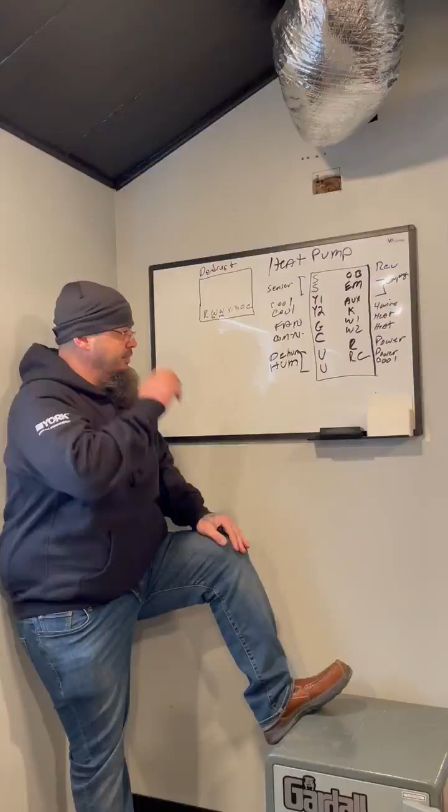Still working on thermostats. We're going to talk about a heat pump thermostat. This gets into one that gets difficult for some homeowners. There's a lot going on in the amount of conductors and functionality that it takes to get a heat pump to operate. So I'm going to lay that out for you so that at least you can see where you're at when you start going with this.

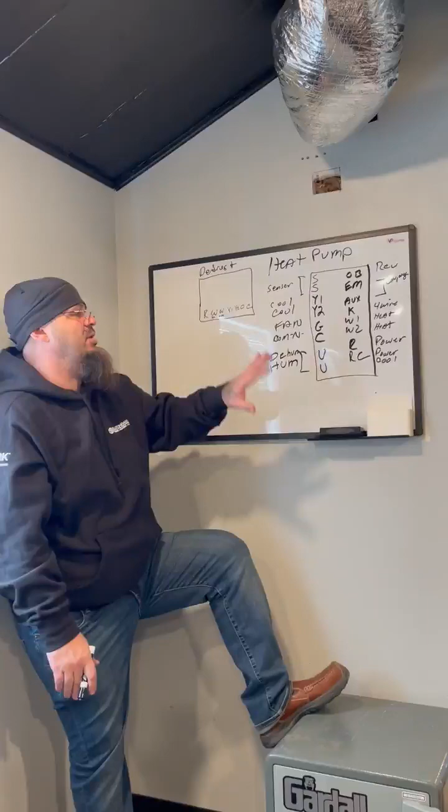I'm doing this in front of the whiteboard because trying to show the backlight of the thermostat on a video, I can get the video to be somewhat good, but it's not perfect. I am gonna do a video with a couple of thermostats and try to get the best picture I can with me actually operating the thermostat. But this way you can really see what's going on clearly. I'll do one of mounting one on the wall. But functionality, selection, wires, all that stuff, classroom time is your best bet with that.

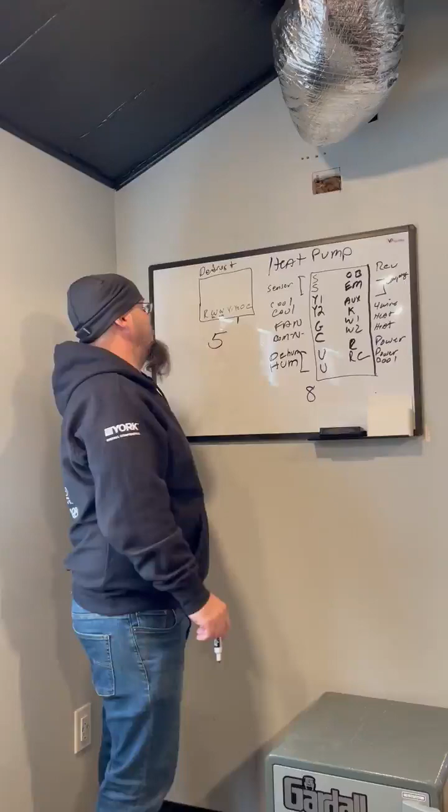So lots of wires with a heat pump. We're going to deal with this as if it's a single stage heat pump. If it's more than one stage, you're just going to have extra wires on Y2. One of the biggest differences is we're going to have a defrost board that we have to work with the functionality as well, and that adds a layer of complication. So typically we have 8 wires coming into the thermostat, and we have 5 wires if it's single stage coming into the defrost board.

You're going to have Y1. Y1 is your condenser wire. Same as in air conditioning, it just tells the condenser that it's time to turn on, in both heating and cooling. So the Y wire doesn't know or care whether you have a call for heating or cooling. All it knows is it's time to turn the condenser on.

Where the rubber meets the road with a heat pump is right here. That's your reversing valve. Inside of heat pumps there is a valve that allows it to switch from heating to cooling. It quite literally reverses the system. So your O or your B or OB is your reversing valve terminal. A little bit of complication there. There are some systems that tried to be too cute and switched the way their reversing valve works compared to everybody else's. The two most common ones are Ruud and Rheem. Basically, they're the same company.

When a heat pump is sitting there doing nothing, it is in heating mode. If you don't power the reversing valve at all and you just give it Y1, it's going to come on in heating mode. When you power the reversing valve, it's going to come on in cooling mode. Rheem and Ruud are the exact opposite of that, and your thermostat, when you program it, is going to ask you heating power for reversing valve or cooling power for reversing valve. Anything other than a Rheem and a Ruud, you're going to set it to power for cooling, because when it gives 24 volts at the reversing valve, you'll be in cooling mode. So that's one of the extra wrinkles with a heat pump.

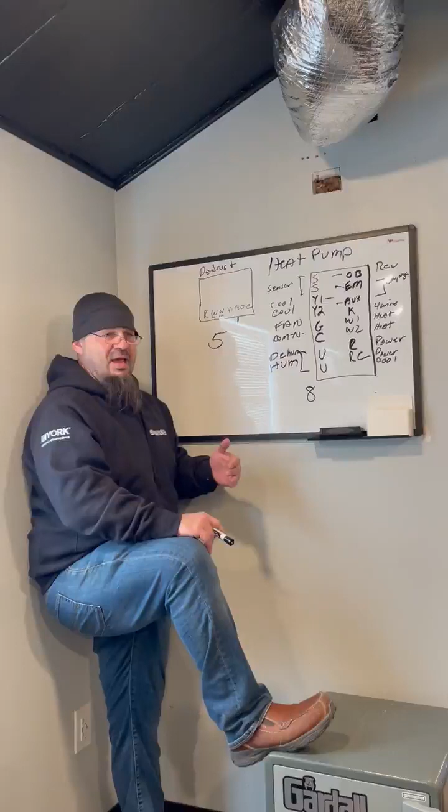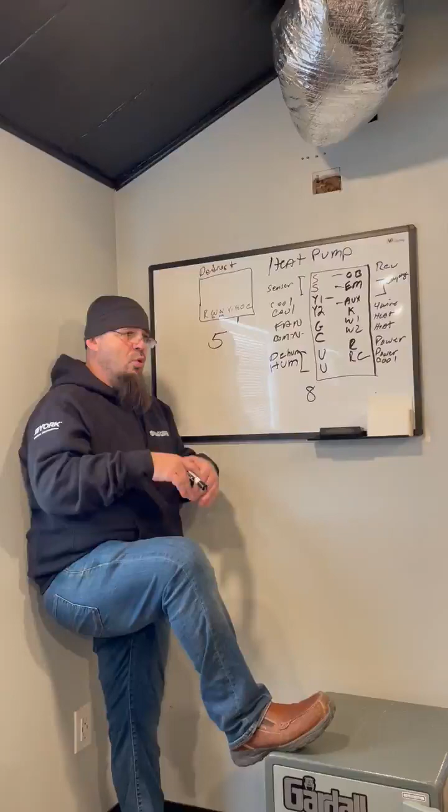So if it runs for half an hour or an hour and it doesn't start to come up in temperature, then it's going to fall back to emergency heating, turn that electric strip or boiler on, and get that system over the hump until either the outside temperatures rise to where the heat pump curve can fill the capacity inside the house, or a call is no longer needed.

In emergency and aux, most thermostats are going to ask you if you want them both powered at the same time. Typically, you're just going to say yes. There are things you can hook up to this system that you would want to operate independently. If you have a system like that, you're probably going to need your technician to come out, because that's another layer of complication. So this emergency heat will operate on its own. It's an automatic switchover based on what the thermostat's programmed to do.

It's going to switch it into emergency heat without any interface from you. It also gives you the option to push it into emergency heat. That can be necessary for a couple things. One, it's taking too long and you happen to be in the space and it's blowing cold air on you, and you're like, that's uncomfortable, and it's because it's too cold outside and the thermostat hasn't caught up yet, or whatever the case may be, and you can push it into emergency.

The other one is there's a problem with the heat pump. If the heat pump outdoor goes down, you can push it into permanent emergency heat mode and run on your electric backup completely until you have a service technician come out and figure out what's going on with the outdoor and get that repaired.

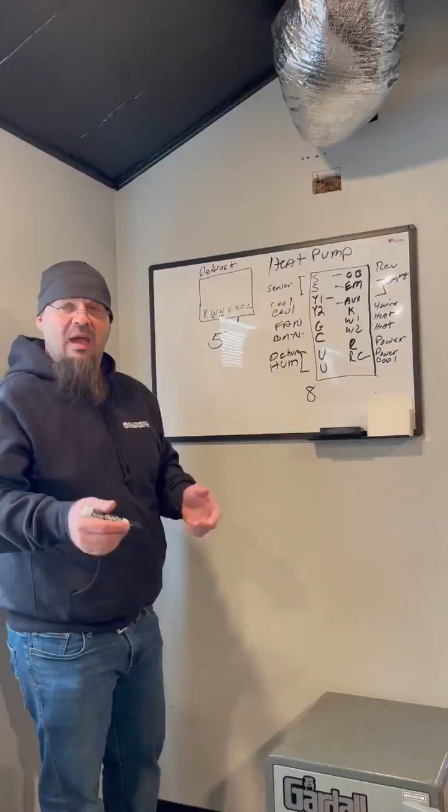Also with the heating on the thermostat, you're going to be coming from W2, okay? You're not going to connect to this. Do not connect a heat pump to W1. I can't tell you how many times, even technicians I have, have tied into W1 because they forgot and they are used to doing furnaces. They tie into W1, and then I get a call back because we have to put that wire onto W2. So heat pumps are always wired into this W2 for primary heating.

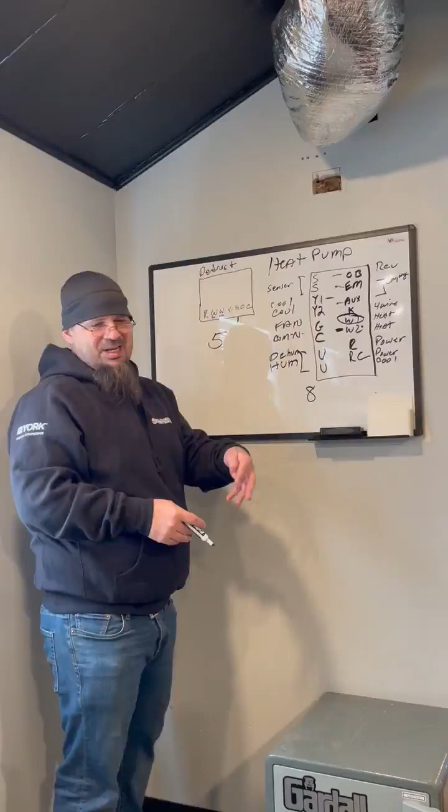So that W2 is going to go down to your air handler that has your terminal blocks in it. Some of them have terminal blocks, some of them just have a bunch of wires sitting inside of the air handler. Either one, it doesn't really matter. The rest of the wires in here are doing the same stuff that they normally are doing. Your R wire is power, your common wire is common, G is fan, Y2 is going to be for 2 stages of cooling. All this stuff is the same.

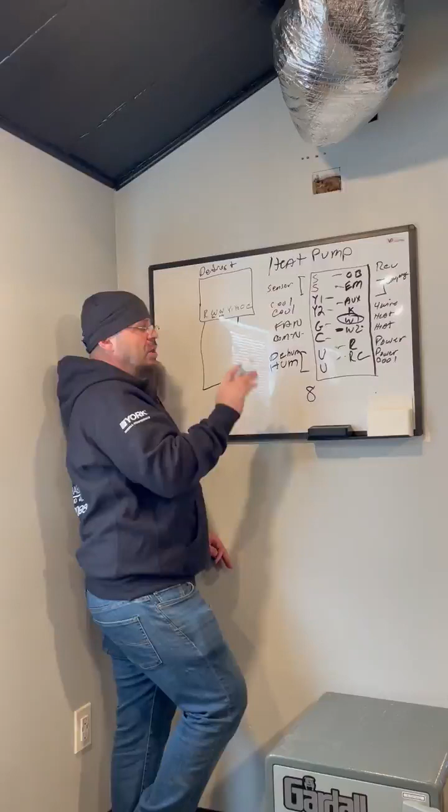Here's something that I do want you to know. In your outdoor defrost, you're going to have all these wires landing inside of this air handler down here. So you're going to have a bunch of wires going on if you look in there. R is power. It's the same R that's here. They're going to come to the air handler, and that's going to provide power for both of these systems, okay? So R here and R here, the same exact power source. They're both providing power.

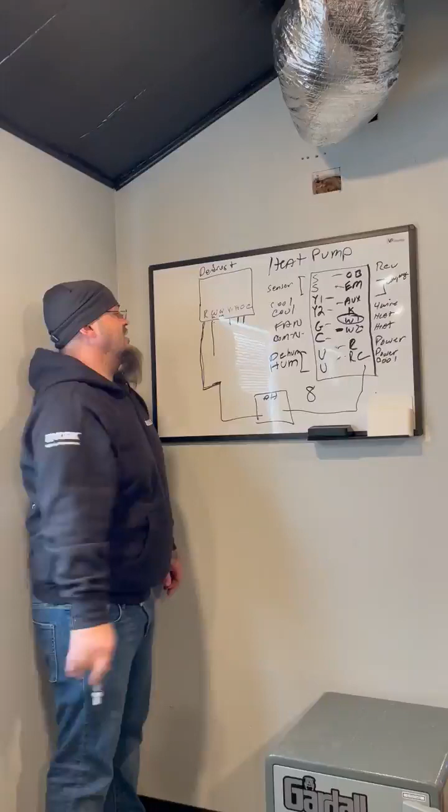W in, okay? W in is actually going to be tied to your W2 wire in your outdoor. That is when you're calling for regular heat pump heating. W2 here gets energized. W in or W1 is on the defrost board. That tells the outdoor that there is a call for heating. You're also going to have 24 volts on O, and 24 volts on Y. So all of that is going on at the same time. In a regular call for heating, all of that gets fired up. So that's how that's going to work on a regular call for heating.

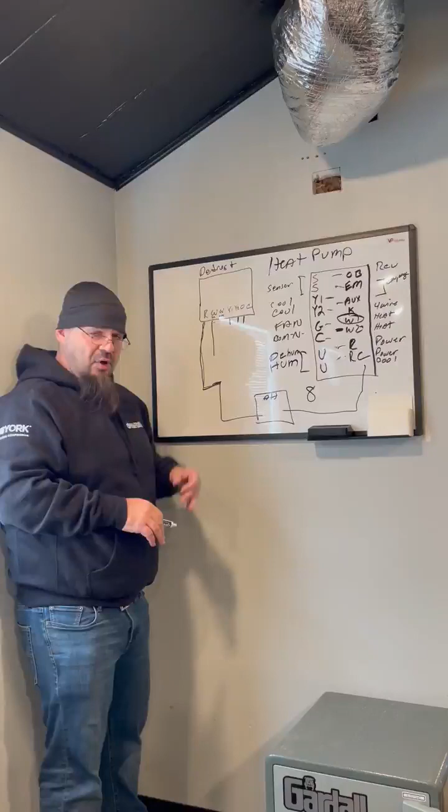Here's what goes on. One, I already explained the emergency heating, how when you have too cold of temperatures outside or some disruption to the system, it will default to running your backup system, whatever that may be, okay? The other thing that's going to go on is this W out right here, this guy. That W out allows the defrost board to actually come back to the air handler and turn on the emergency source of heating. Well, why does it need to do that?

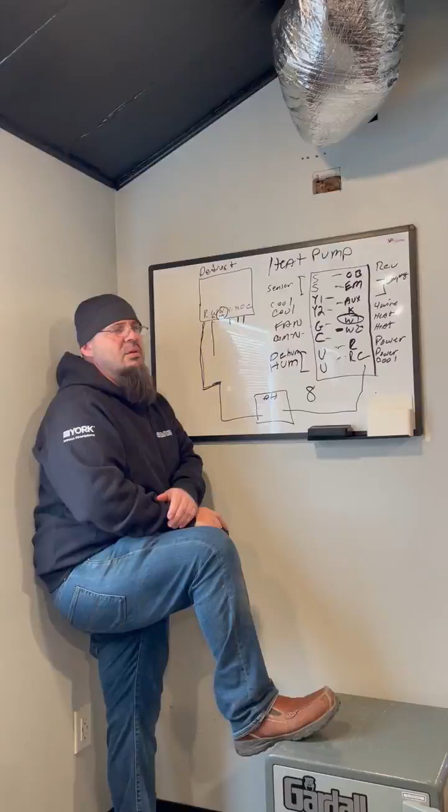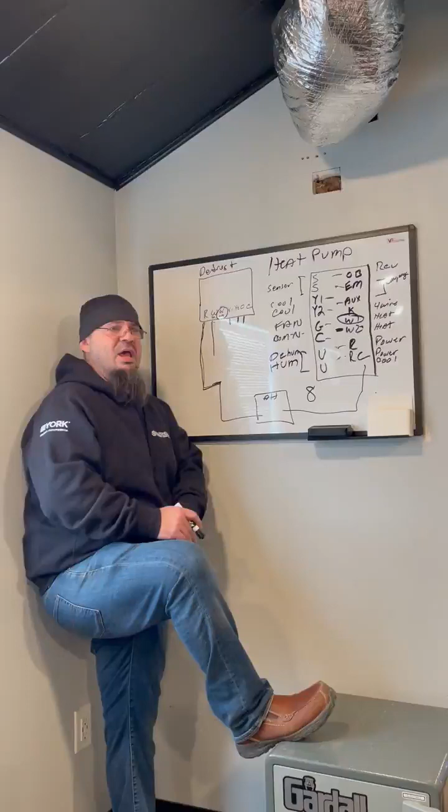Heat pumps do something called go into defrost mode, and I covered this in the heat pump outdoor video. When the heat pump goes into defrost mode, what's happening is the heat pump generates enough cold that any moisture in the air clings to the coil outside, and it starts to build up ice on it. So there's logic in this defrost board that says every so often, usually timed, we need to run in air conditioning mode with the fan turned off, and that makes the coil get hot like it normally would in air conditioning mode, and then it melts off all that ice, hence it's called defrost mode, and then releases some water vapor and gets the system back to a steady state.

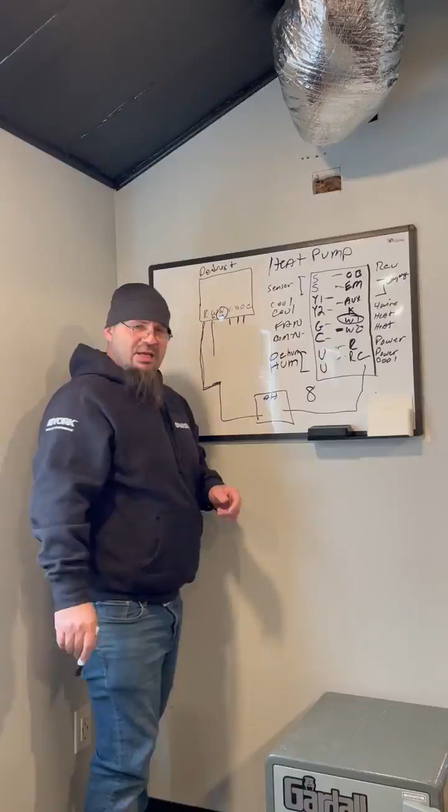Well, during that process, which can take anywhere from 5 to 10 minutes, if this is blowing, it's going to be blowing cold air all over the inhabitants, and that's not comfortable for anybody. On really cold days, defrost cycles are more common, so you can really end up losing some temperature and not being able to catch back up because you have that break in the system running.

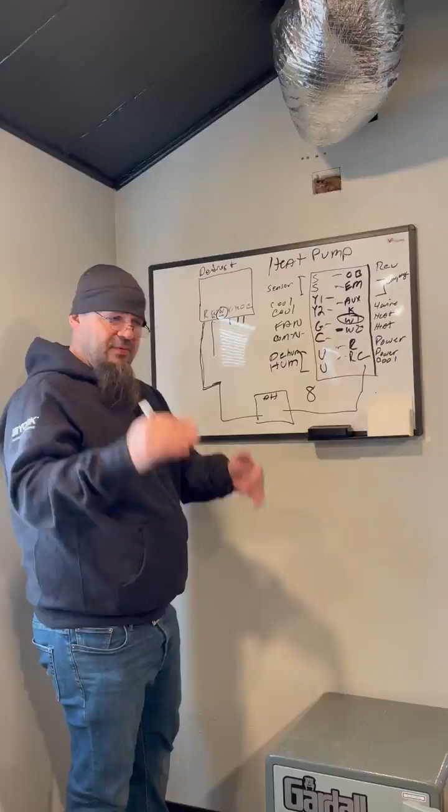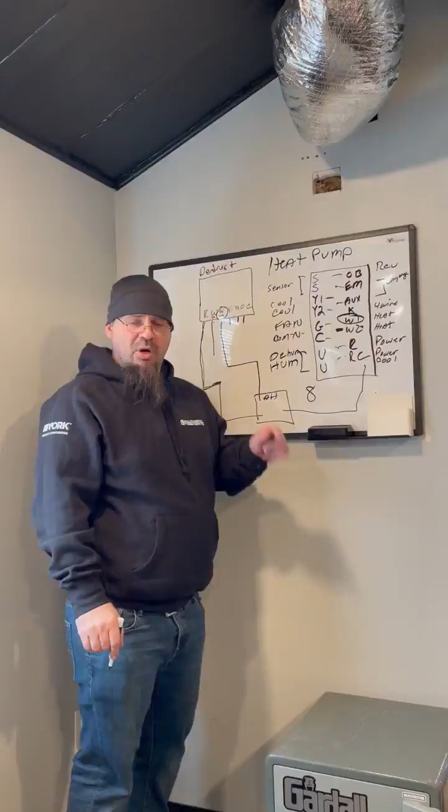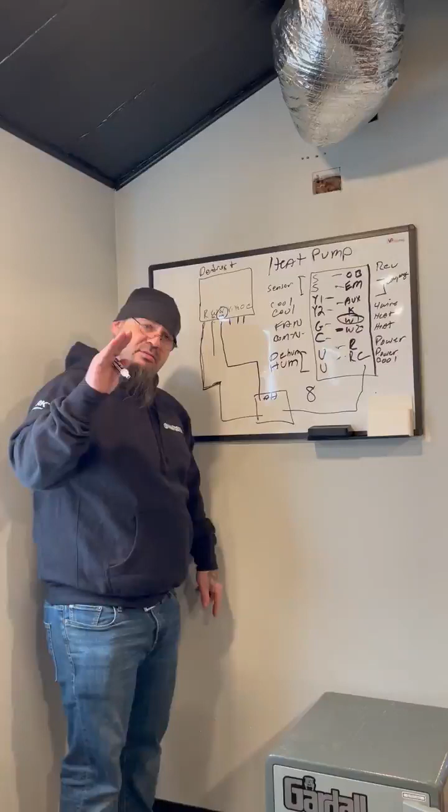So what the defrost board does then is it energizes W out and sends it down here to the air handler and turns on your emergency backup strip while all of the defrost action is going on. And what that does is it keeps you from getting cold air blowing all over you, and keeps the temperature in the room from cascading down while that defrost action is going on.

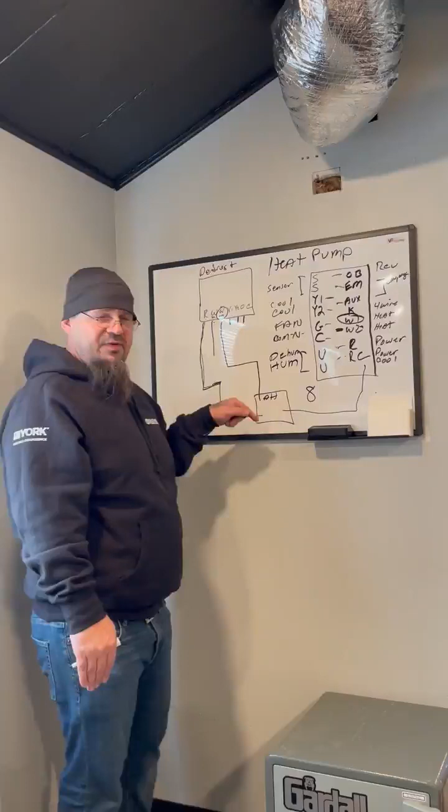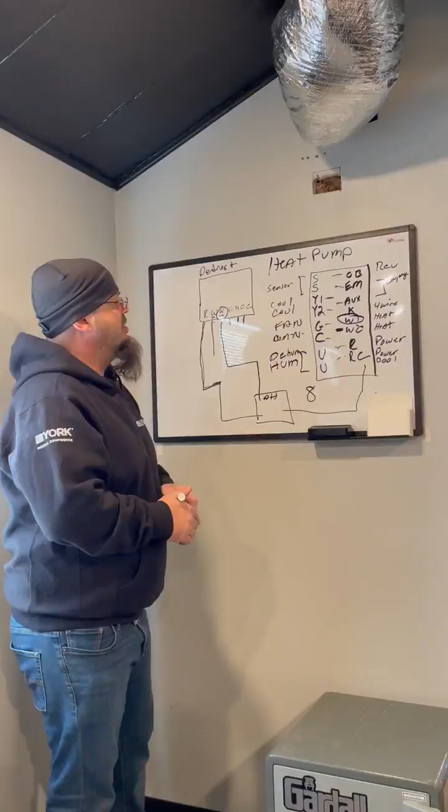So you actually have to give the outdoor the ability to turn on your emergency source of heating, be it boiler or electric, so that during those defrost cycles you don't end up with a room that's 67 instead of 70, and then not being able to catch up because it's so chilly outside. So that's some of the differences with heat pumps and the way their thermostats work.

Again, what I want you guys to do is I want you to open this guy up. You're not going to see all of this when you go to do a thermostat swap out. I want you to understand what all you have going on to just some small degree, so you understand how much more is going on here, and it'll help you decide whether you want to touch the thing in the first place. But if you do, I want you to do the same thing I always tell you.

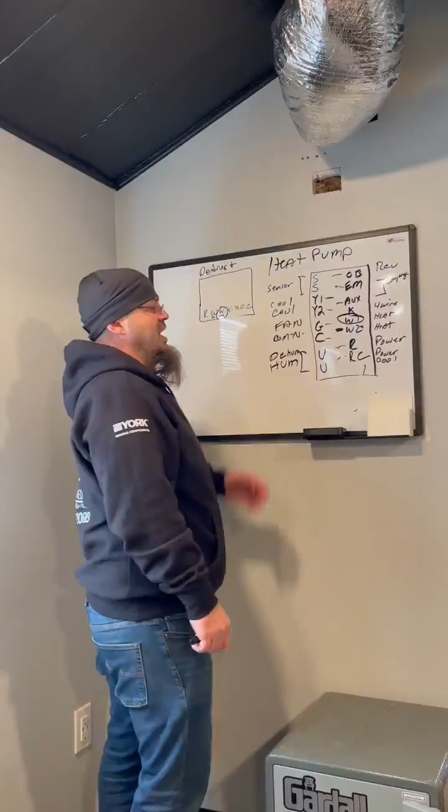Do your research, make sure you have a compatible thermostat. Pull the face off the wall, take a picture of the way the wires are landed already. As we've said multiple times, the colors that are inside here don't really mean anything. They're a convenience matter. What matters is where those wires are landed on this base plate. That's what's giving it functionality.

You're also going to have more questions with a heat pump when you actually put the face on there and program it, that are going to be a little more detailed. It's going to ask you things like how many cycles per hour. Cycles per hour, put it up to the max. Cycles per hour is foolishness. It will limit the amount of times that your heat pump can run in any given hour.

And if you forget and set it on 3 cycles per hour and it's freezing out and it's satisfying often, or you have a drafty house where it has to cycle a lot, it'll then lock the system out for a half an hour, and the temperatures will plummet in there. So there are some questions that a heat pump thermostat is going to ask you that you're going to have to be prepared to answer.

You're going to have to answer how many stages are in it. You're going to have to answer, is this reversing valve going to energize on cooling or heating? That's your OB. Okay, you're going to have to be able to answer that. Some heat pumps have a need for a sensor wire because they're hybrids, and they have a boiler backup, and they actually have to lock out the thermostat at a certain temperature.

If you get into that, you should be pretty advanced to be able to do that, because you're going to have to lock out your condenser at a certain temperature and force your backup system to come on, or you're going to create problems inside the system. So some heat pumps do require a sensor.

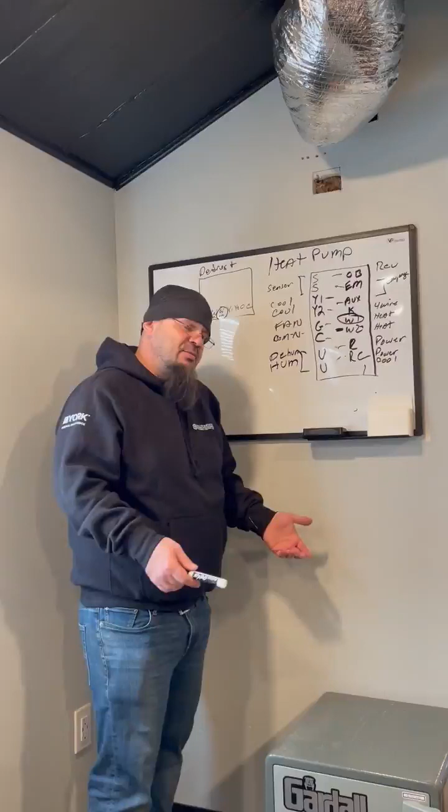The good news for you is that if you really want to try one, if it's one of these, make sure your HVAC technician knows you're going to try it, okay? Some techs and some companies really don't favor that, and they're going to give you a hard time. I really don't care if you want to try and put your thermostat on, and if you try and fail, I'm going to run out and help you, okay?

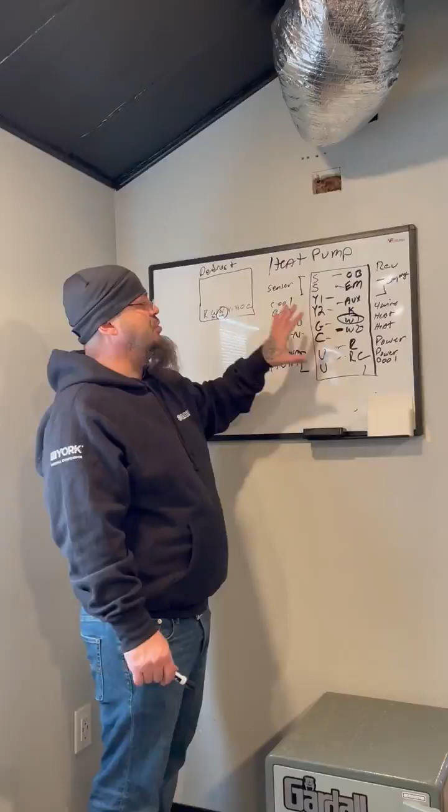The other thing is that you can get the manufacturer's tech support on the phone and get them to walk you through. You should be able to get the wires back where they went, like I've told you, okay? But the functionality, the programming, they can really help walk you through how to properly set it up. If you say, hey, I have a hybrid heat pump system and I have this and I have that, they can walk you through how to lock out your outdoor condenser. They're going to be able to help you.

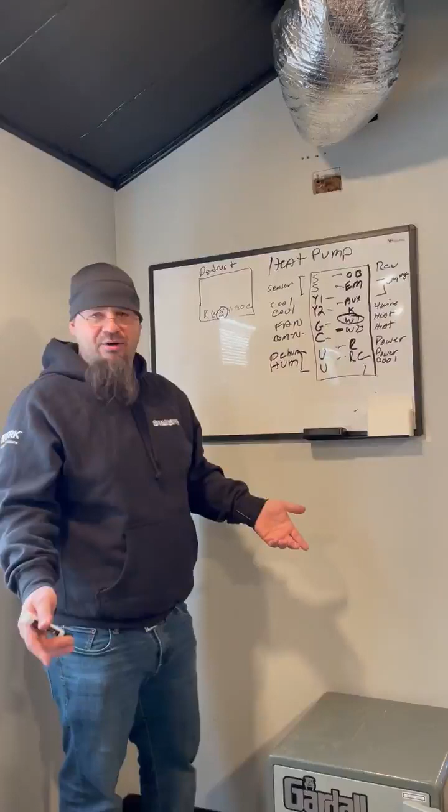And when you get into one this complicated, or any thermostat swap out, I suggest you do this early enough in the day. Don't do this at 3:30, okay? When Honeywell's closing, your HVAC contractor's closing, and everybody's going home. Don't do this 3:30 on a Friday or Saturday afternoon, when then it becomes an emergency service call. Do this as early as you can on a weekday if you can. An emergency service call over this would sting.

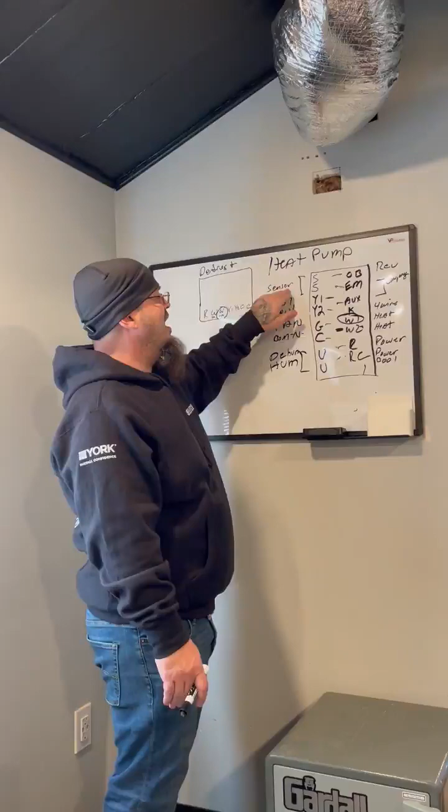So that's your heat pump single stage, and again, 2 stage is just going to have a Y2 wire, but that's a pretty basic heat pump. Anything beyond this, you might want to have your HVAC contractor do it. And if you're going to have a lockout on your sensor because you have dual fuel, you may want to really make sure you understand it first, maybe put that call into tech support first, or have your HVAC contractor do it. Thanks, guys.